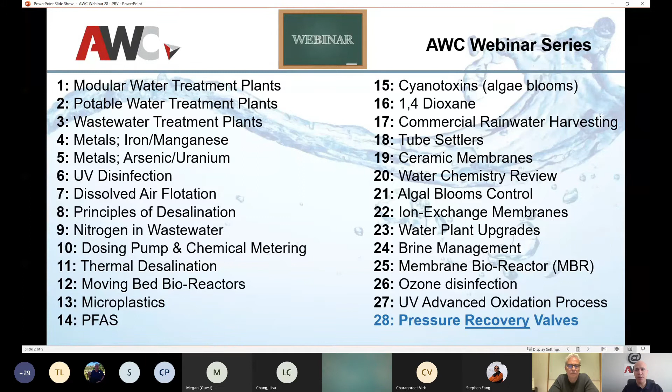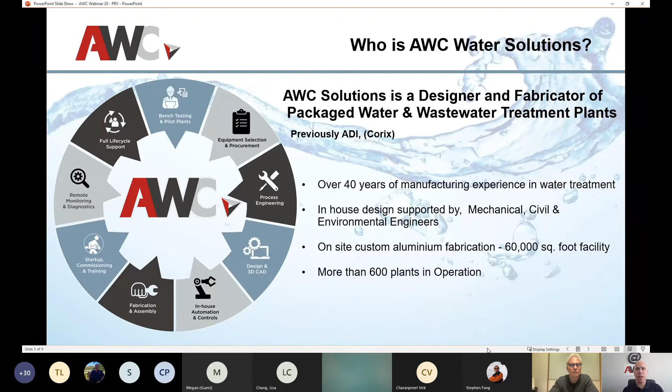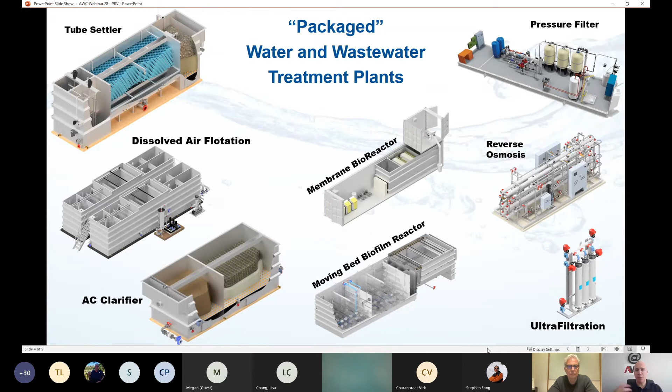So just a background on AWC, we've been around for 40 years. We have close to 600 plants, both water and wastewater treatment plants, worldwide. We divide everything into potable water, wastewater, and skid-mounted systems. And this is what I love about PRV: you could potentially be adding to any one of these, whether potable or wastewater, and we'll get into it a little bit more.

Of course, before we get started, we do have to highlight today is Earth Day. We had World Water Day last month, now we have Earth Day. So my question is always, how are you going to celebrate Earth Day today or this week? And every day is Earth Day, we live here, right? So we don't have a choice.

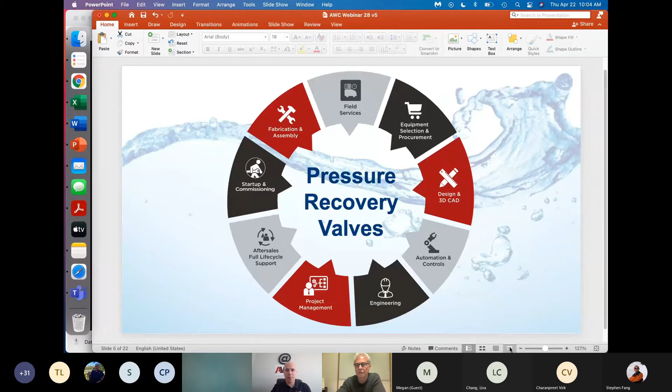InPipe Energy is a renewable energy and smart water technology company that's developed a new product called the In-PRV, a pressure recovery valve. It allows water departments and operators to precisely manage pressure, just like they're doing today, but to take that available excess pressure and convert it into a new source of renewable energy. With the In-PRV in place, a water department can manage pressure precisely, but reduce their operating costs, save carbon, save water, and extend the life of their infrastructure without changing their current operation. And I'm going to tell you about that now.

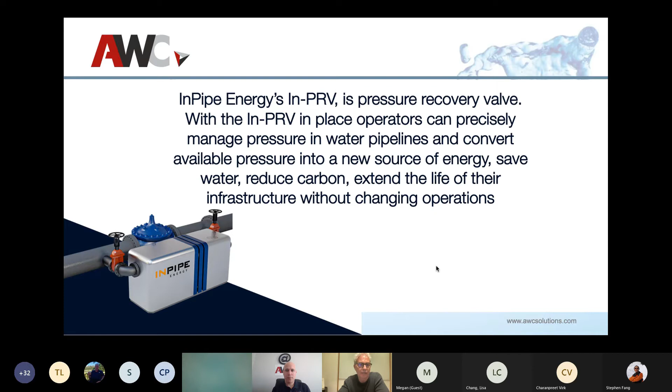As you know, water is the most important resource on the planet, but it's also very energy intensive. For many of our customers, energy is their second highest expense, and oftentimes can be over 40% of their budget. Water is conveyed similarly all over the world: it's pumped up a hill at night, stored in a reservoir or overhead tank, and then distributed through pressurized pipelines into the service area. These pipes are pressurized either by pumping or by gravity. Water departments manage to deliver safe, clean drinking water at a specific pressure, so that when one of their ratepayers turns on the shower in the morning, for example, it comes out at the right pressure. The way they do that is using control valves, in particular pressure reducing valves, or PRVs.

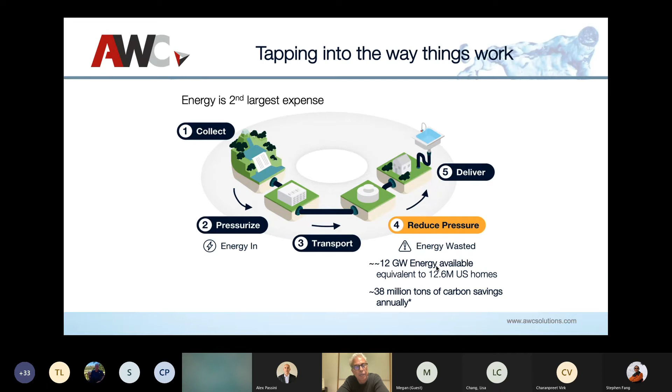These PRVs are distributed throughout a water distribution system. We worked with Mueller Water, one of the leaders in valve technologies in the United States, and sized our market as an opportunity to recover about 12 gigawatts of potential energy if we were fully deployed throughout the United States, and offset about 38 million tons of carbon annually. This would be a savings to the water industry of over $60 billion, and would significantly free up capital that could be used to reinvest in water infrastructure and make it more resilient.

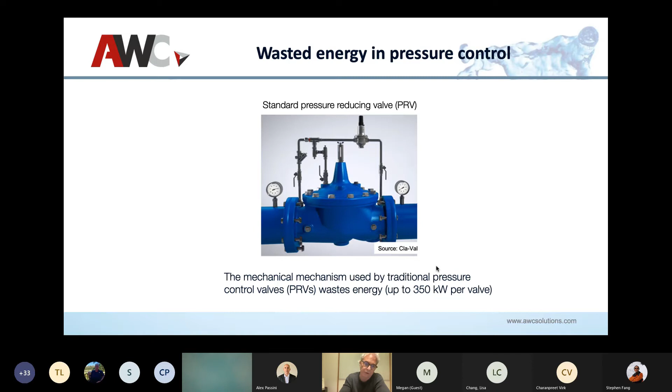So this is a typical pressure reducing valve. I'm sure most people on the phone have seen these. This is the inside of a pressure reducing valve. And pressure reducing valves do a great job of managing pressure.

But the way they work, they basically use a mechanical mechanism, a spring with a diaphragm that is set to take out pressure. So water departments, if it's 100 feet on the upstream and they need it to be 60 feet, they set the diaphragm to take out 40 feet of pressure.

And they kind of work like the brakes in your car. They're set, and then the pressure is dissipated through friction or heat, and that allows this process to occur to get to the right pressure.

But the way they do that wastes this excess pressure that could be used as a new source of renewable energy. That's kind of like how the Prius works, if you're familiar with that mechanism in the brakes - they call it regenerative braking. And that's basically what InPipe has done with the In-PRV.

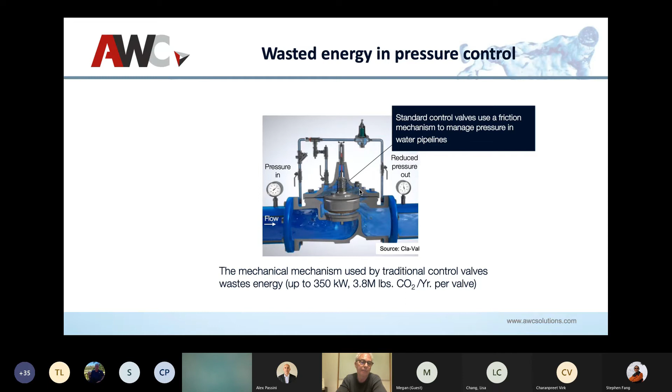The In-PRV is designed to be turnkey - really easy for you to install, operate, and maintain the system. And once it's in place, it works automatically to manage pressure and then offset your energy costs by turning those into energy. It also sends out data.

It can be integrated into a SCADA system, or it provides real-time 24/7 hydraulic data, flow and pressure, energy generation, and carbon reduction data to an iPad or iPhone, a device like that, remotely. And because we are taking advantage of hydroelectricity, this is the lowest cost source of renewable energy that you can have.

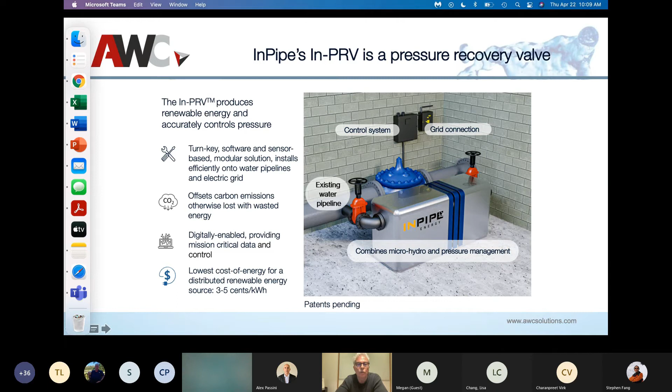So the way it works is we basically work with water departments. We understand where their valve locations are, and then we work to try to understand the hydraulics. We do a free hydraulic analysis and economic assessment. And once we get through the process of knowing that this would be a great place to do energy recovery,

we basically build a bypass around the existing valve. And we use hot tapping if we can, so that we can put a hole in the pipe without turning the water off. And then we put in these two gate valves. We install the In-PRV and a control system.

And basically then what happens is that the water department basically says, it's time to take out pressure. There is a flow control valve inside the In-PRV that opens up, and water naturally flows into the bypass, where there's a micro turbine that spins a generator that's connected to the grid, electric grid panel at the facility.

It meets all the requirements that have been established by the solar industry, so the electric utilities find it safe and compatible with their regulations.

The water flows through the microturbine to a downstream pressure reducing valve that's set at exactly the downstream pressure that the water department needs it to be. And then the water flows back into the main pipeline at the exact pressure that the water department requires, into the service area. So this is all done continuously and naturally without any intervention by the water department.

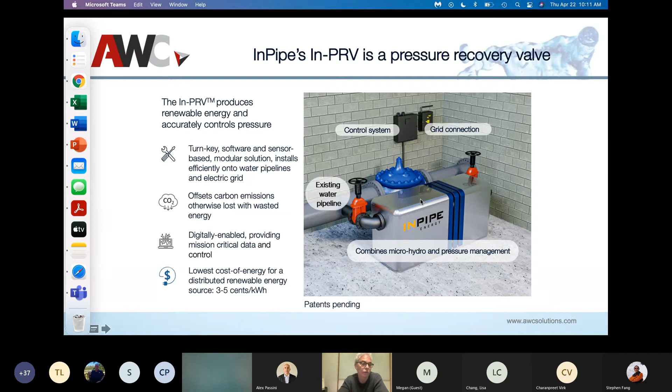But it allows the water department to choose whether to manage the pressure using their existing setup, which is still there just the way it was before the In-PRV was installed, or to use the In-PRV to manage pressure and generate a new source of renewable energy.

So as you know, there can also be variability in the flows of water in these pipelines. It can be daily variability, it can be seasonal variability. The In-PRV is modular so that we can install multiple NPRVs in place at a facility, and then our control system will automatically determine which is the best In-PRV for a given flow and pressure situation that may occur, either on a daily, monthly, or seasonal basis.

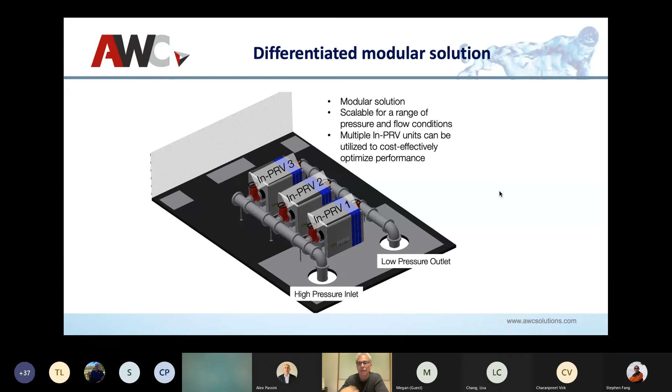The ideal conditions for the In-PRV are where you have existing control valves that are taking out pressure. We need pressure differential, either a PRV, a sleeve valve, or a control valve to create the setup so water will flow into the bypass, and then we take out that excess or wasted pressure. It's usually behind the meter or where we can offset important or energy-intensive equipment like pumping facilities or purification facilities. Or we can connect it directly to a grid, an EV charging station, or hydrogen electrolyzers—anywhere you need low cost energy, the In-PRV is a great source for that opportunity.

Usually we go into gravity fed systems—that's usually where the PRVs are. But we could also go into outflows, effluent streams, post-treatment water streams that are flowing to fill aquifers, fill wells, or going back into a river. Wherever there's excess pressure, we could use the In-PRV to recapture that energy and help water departments reduce operating costs due to electricity.

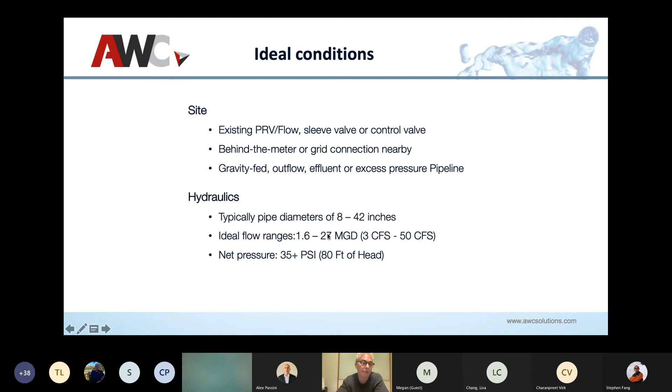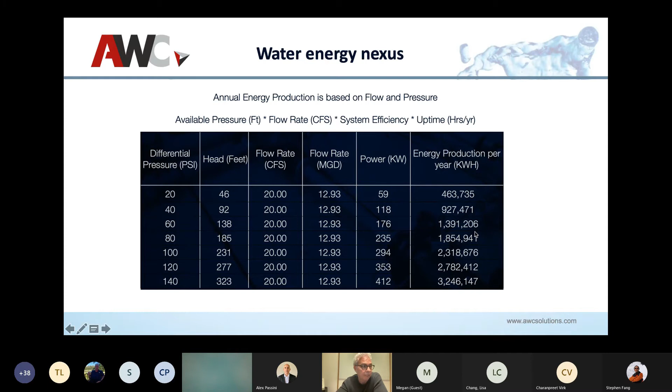The amount of energy you can produce is a simple physics equation: it's just available pressure, the flow rate, and the system efficiency. Our system efficiency is about 80%. So depending on the amount of pressure available to take out, times the flow rate, will determine how much electricity you can produce. And you can see from this table that if you start to get a significant amount of head and flow, you can start to generate a significant amount of electricity as well that can be used to bring money back to the water department.

So InPipe is currently at the stage where we're doing field trials in the United States and Canada with water utilities to help us improve our site selection protocols, our design standards, and our business models. Typically, InPipe will fund the design, installation, operation, and maintenance for an installation without any out-of-pocket cost to the water department, in exchange for an agreement to purchase the electricity directly from us. This is a typical structure that other renewable energy technologies like solar and wind have deployed, and we want to bring the same opportunity to water departments.

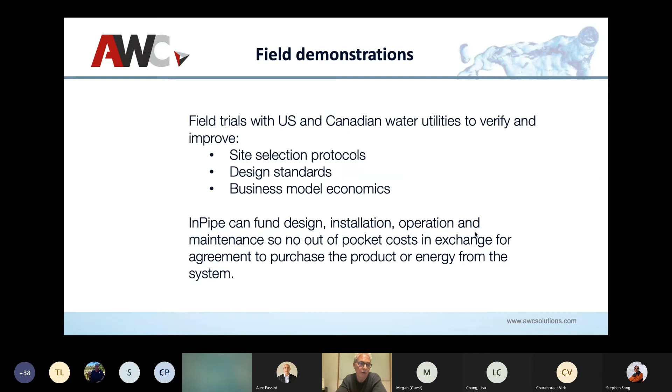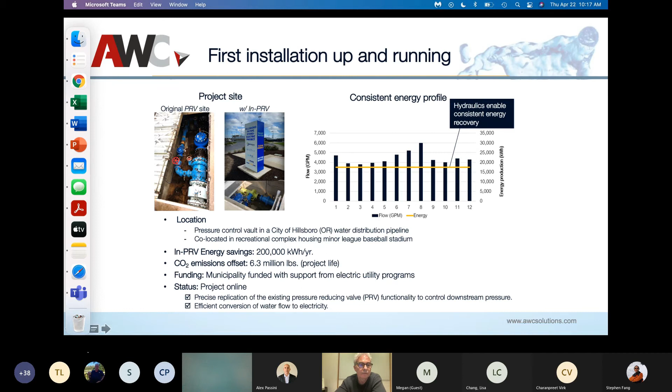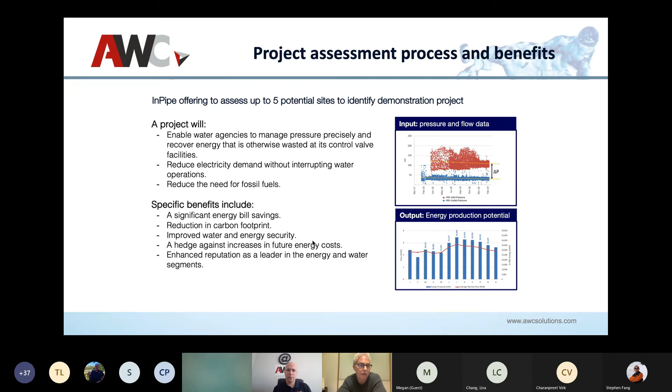So typically what we do is we meet with water departments and do a hydraulic assessment. We look for data, we want to understand your flow and pressure at your PRVs, and then we do an assessment. We come back to you with a report showing what this would mean in terms of energy recovery and economics over the lifetime of the project, which should be 30 or 40 years. And we do all of that for free.

We have a very specific process we use, called 10 steps to a successful project. We meet with you, do the hydraulic analysis and potential energy assessment, a site visit, and a further economic assessment. We work toward a non-binding memo of understanding so we can agree on what we're going to try to accomplish together. Then we do a detailed design proposal, a system layout, a schedule, and a budget. We bring in mechanical and electrical contractors to install the system, do a contract, the regulatory permitting, the interconnection, the PPA application to the electric utility, and the installation. And we do all of that for free. We love doing all these applications and paperwork so the water department doesn't have to.

We do it all collaboratively, and there's no charge for any of it, except for ultimately either a power purchase agreement, or oftentimes the water department really just wants to purchase it themselves so they can take advantage of all the economics.